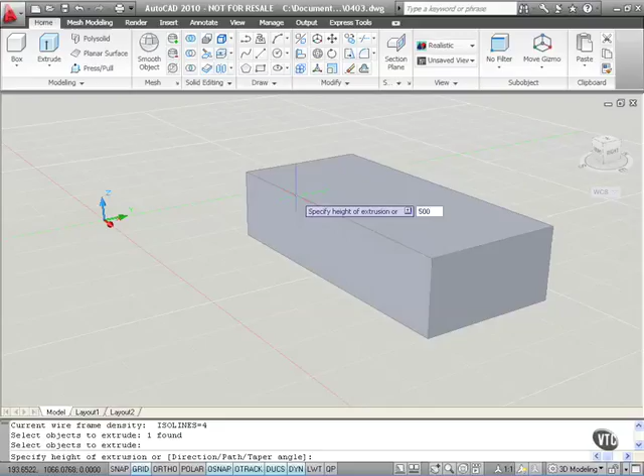What I'm going to do is extrude that rectangle using the extrude command. I click on extrude, select the rectangle to extrude, press enter to confirm it, and as I move upwards in the Z axis, I can specify the height of that extrusion. I'm going to make that 500, and there's my 3D solid.

As you can see, I hover over it and AutoCAD tells me it's a 3D solid. I'm just going to zoom back a little bit and pan a little bit now. Make sure down on the status bar here that DUCS is on.

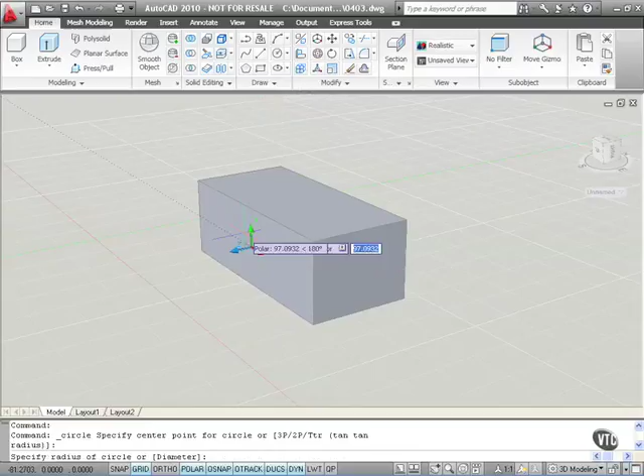Allow your dynamic UCS, because now I'm going to draw a circle here, hover over this face and place a circle. Can you see I'm just moving the radius there? And there's my circle.

I'm going to place another circle now. Click on the circle command again, hover over this face. I want to place a circle on this face here, like so. Left click, and I'm just going to press enter there, so I know each circle has the same radius.

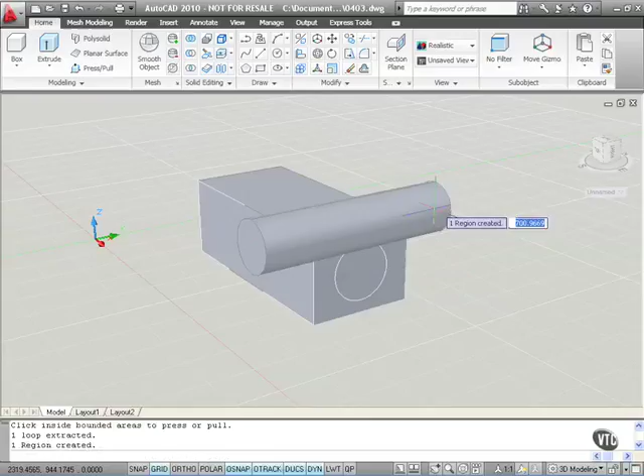Utilizing press pull here now, I can hover over each of these circles, drag it through the solid object like so, and it puts a hole through it for me. Do the same again with the other circle. See the circle highlight, left click, drag it through the object, left click again, and I've now got holes through my 3D solid.

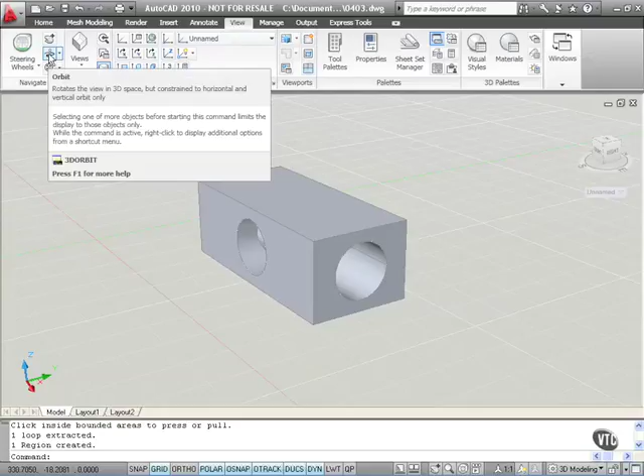I'm now going to go to the View tab on the ribbon, go to the Navigate panel and utilize my Orbit option. If I click on Orbit now, using the mouse, I can orbit around my 3D model, and I'm proving to you there that the holes do actually go all the way through my 3D solid. I can right click and exit my orbit like that.

So we have a 3D solid ready to go. What I need to do now is go to my Output tab to output this as a stereo lithography 3D print so that somebody can build a prototype for me.

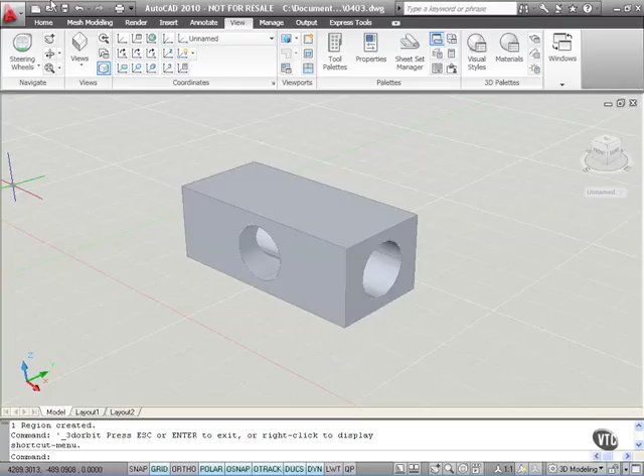So I go to the Output here, and what I've got is various options. I can plot it if I want to - that'll give me a nice pretty 3D picture. I can export it to a 3D DWF if I want to, or a PDF file. But over here, on the right hand side, I can send it to a 3D print service.

So I click here, and I get two options. I can learn more about preparing a 3D model for printing - I'm going to leave that up to you to read and learn more about it. I'm going to click on Continue, and I now have to select my solid.

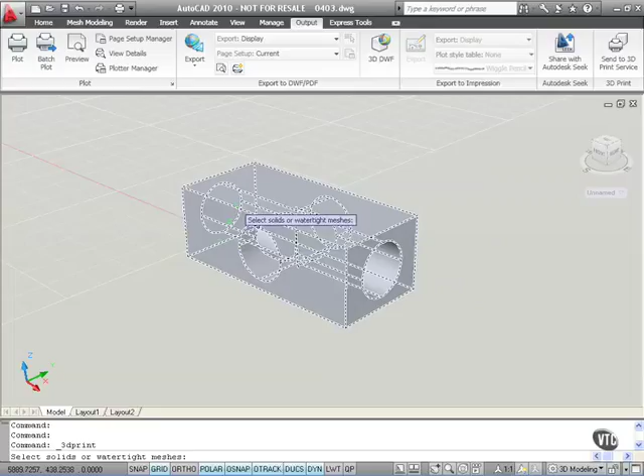So I click on it, press enter, and it brings up a dialog box that gives me all the information about my 3D solid. I have one object, one solid. I have the scale, the length, the width, and the height. That will all go to the 3D printing service.

So I click on OK now, and I get a dialog box which is very simple. It's asking me 0403 STL, that's the stereo lithography file - notice it's the only file type you can use. So when I click on Save, that will save that as an STL file, which I can then send out to my 3D printing service. They will then create a prototype model and return it to me from the 3D geometry.

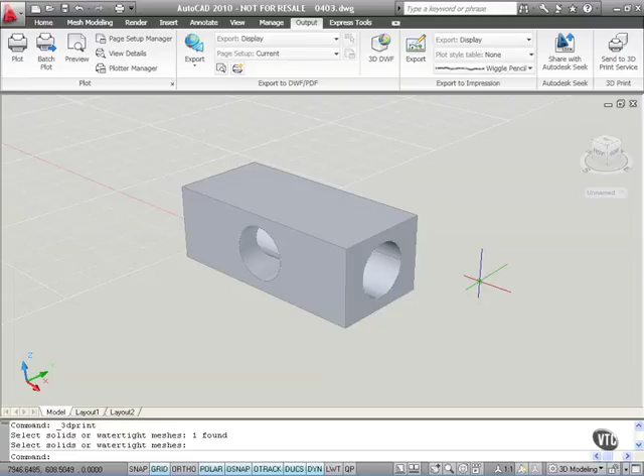As you can see, the support is much enhanced for 3D printing. And also, you can see it's a very productive, effective interface again. This is where AutoCAD 2010 can help you dramatically in your 3D drafting and prototyping.